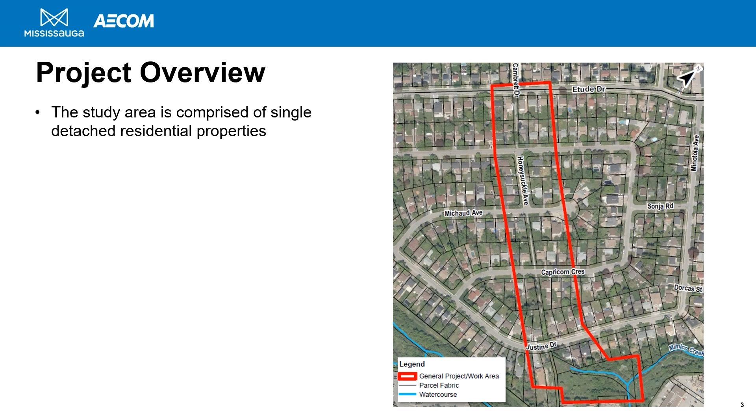The general area between Etude Drive and Justine Drive in Malton is comprised of mostly single detached residential properties and is subject to urban flooding during storm events, including the rainstorm that occurred on July 8, 2013, which affected a number of homes in the neighborhood.

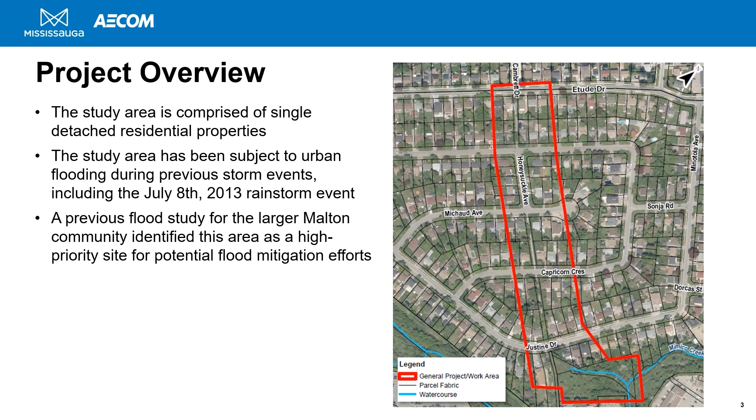Previously, a flood study for the larger Malton community, led by the Toronto and Region Conservation Authority, TRCA, was undertaken, which investigated flooding across the entire community and highlighted this area and others for potential flood mitigation efforts. Based on that study's findings, the city identified this area between Etude Drive and south of Justine Drive as a high priority site and initiated this flood study.

The goal of this study is to mitigate urban flooding risks to people, property, and infrastructure. The study has identified and evaluated various alternative solutions, including the preliminary preferred solution to help mitigate flooding.

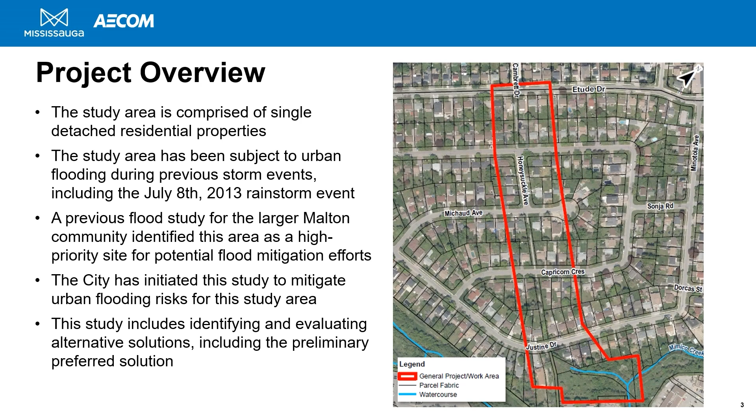The study is following the Schedule B planning and design process in accordance with the 2015 Municipal Engineers Association Municipal Class Environmental Assessment document. This included creating awareness of the project and engagement through notifications to agencies, stakeholders, Indigenous communities, and residents. Residents were also sent letters outlining the specific potential impacts to city-owned lands adjacent to their property beside the pedestrian walkway, within the road boulevard, or beside the outlet structure and channel.

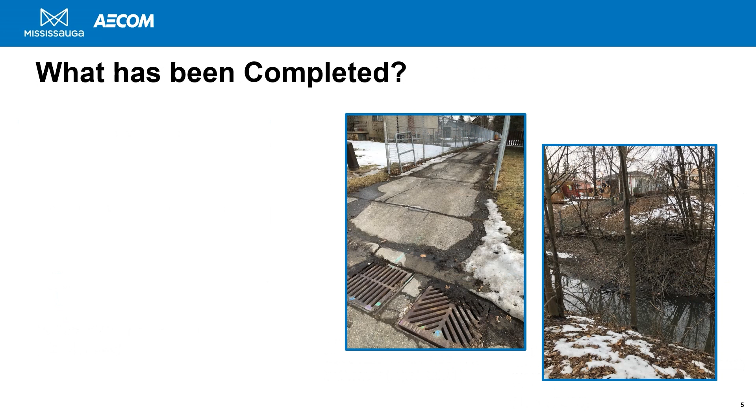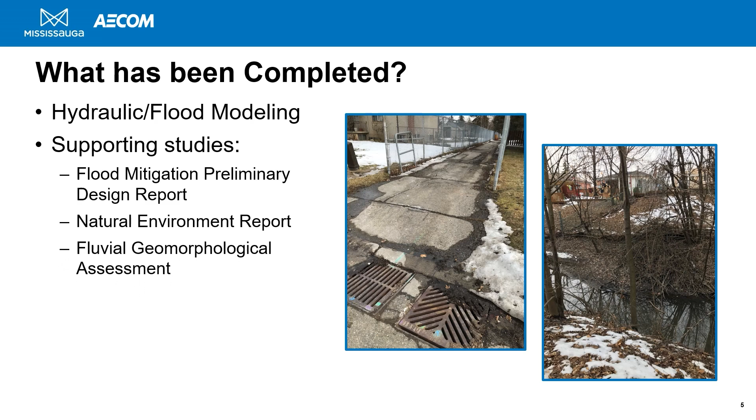The scope of this project involves hydraulic and flood modeling and supporting studies to understand the existing conditions of alternative solutions being evaluated and to support future project design. These include Flood Mitigation Preliminary Design Report, Natural Environment Report, Fluvial Geomorphological Assessment, Arborist Report and Tree Preservation Plan, Stage 1 Archaeological Assessment Report, Cultural Heritage Memorandum.

The Natural Environment Report includes an inventory of the existing natural environment conditions, including aquatics, including fish and fish habitat, vegetation communities, significant wildlife habitat, species at risk. Natural environment features within the study area include Mimico Creek and its surrounding natural area, in addition to street trees and public parks.

The Fluvial Geomorphological Assessment characterizes the fluvial geomorphological conditions along the tributary of East Mimico Creek and East Mimico Creek itself, including delineation of reaches, including their stability and any potential erosion concerns, as well as future channel design considerations.

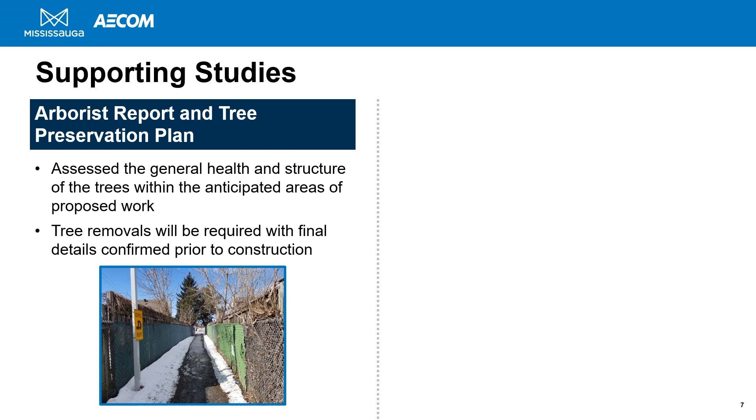The Arborist Report and Tree Preservation Plan assessed the general health and structure of the trees within the anticipated areas of proposed work. Tree removals will be required for all of the alternative solutions, with final details confirmed for the preferred solution prior to construction.

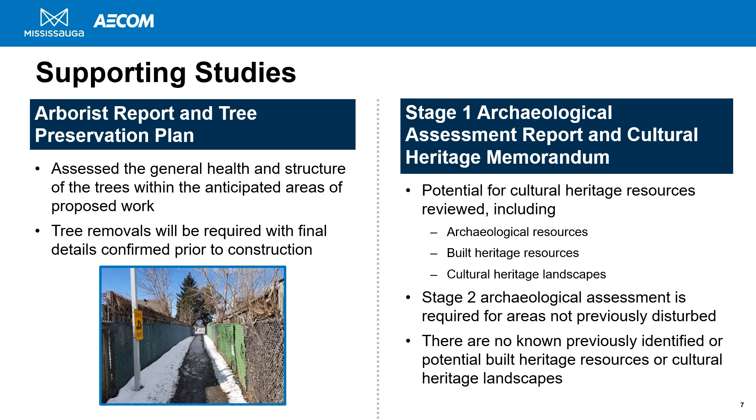The Stage 1 Archaeological Assessment Report and Cultural Heritage Memorandum reviewed the potential for cultural heritage resources, including archaeological resources, built heritage resources, cultural heritage landscapes. A Stage 2 archaeological assessment is required for areas not previously disturbed prior to construction. There are no known previously identified or potential built heritage resources or cultural heritage landscapes associated with any of the alternative solutions.

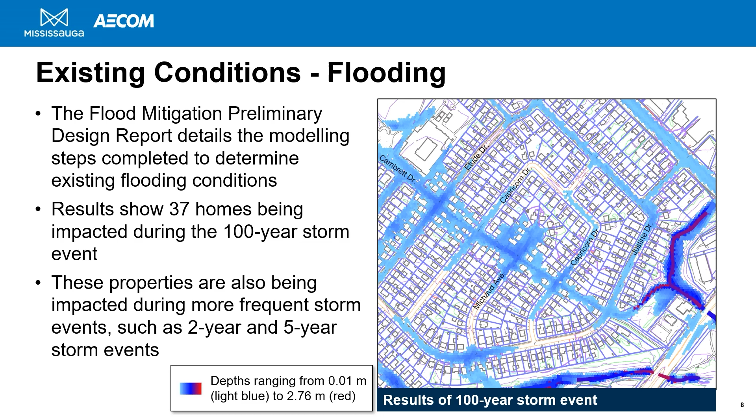The Flood Mitigation Preliminary Design Report details the modeling steps completed to determine existing flooding along the study area. Results show 37 homes being impacted during the 100-year event. These properties are also being impacted during more frequent storm events, such as 2-year and 5-year events.

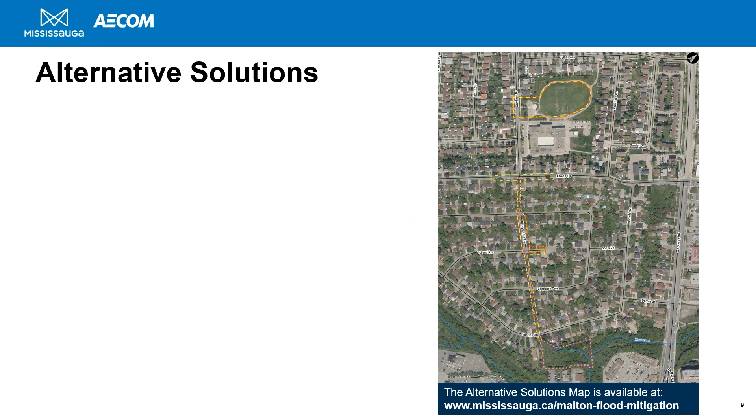5 possible alternatives to reduce or eliminate flooding were explored. All solutions are limited to city-owned lands and/or public right-of-way. Alternative 1 involves replacing the existing storm sewer beneath the pedestrian walkway and within existing city property from Etude Drive to the Mimico Creek outfall channel in Dairy Greenway Park, regrading the walkway and complete outlet upgrades south of Justine Drive.

Alternative 2 involves constructing underground storage in Ridgewood Park, installation of a new relief sewer within the right-of-way, regrading of the pedestrian walkway within city property from Etude Drive to Mimico Creek, and outlet upgrades south of Justine Drive. Alternative 3 involves constructing underground storage in Ridgewood Park, installation of a new relief sewer within the right-of-way, and outlet upgrades south of Justine Drive.

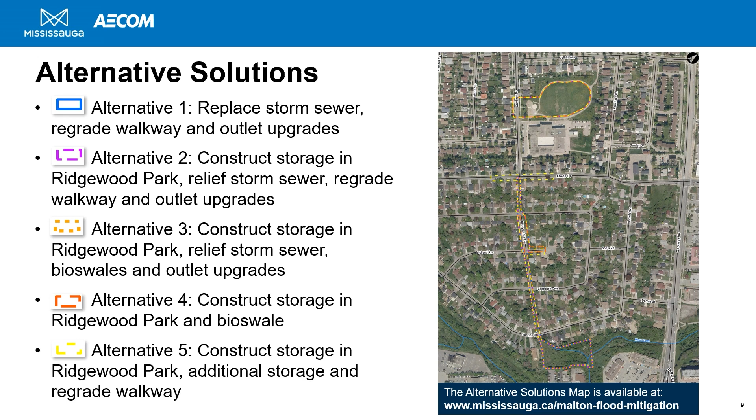Alternative 4 involves constructing underground storage in Ridgewood Park and a bioswale. Alternative 5 involves constructing underground storage in Ridgewood Park, along with additional storage in the right-of-way and regrading of the pedestrian walkway within the existing city property from Etude Drive to Mimico Creek.

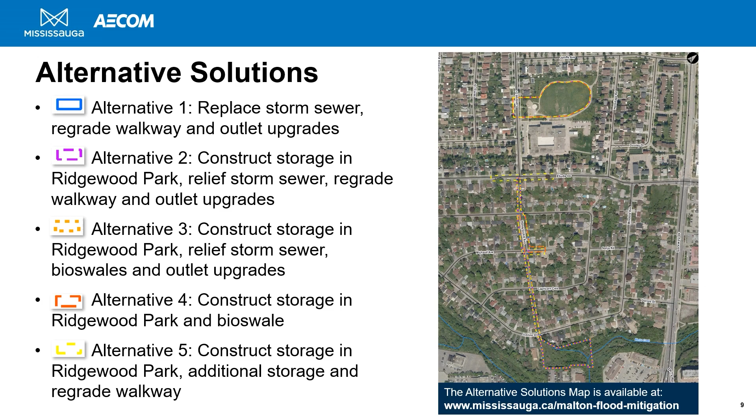The alternative solutions were assessed against various land use, technical, natural environment, socio-cultural environment, and cost-related criteria to determine which alternative had the least overall impact. This included consideration of impacts to property. Based on the evaluation, Alternative 1 was identified as the preliminary preferred solution.

This involves replacing the existing storm sewer with a larger box storm sewer beneath the pedestrian walkway and Honeysuckle Avenue within the existing city property from Etude Drive to the outfall channel and associated restoration. There will also be regrading of the walkway for an overland flow route. The preliminary preferred solution also includes outfall upgrades south of Justine Drive at the outfall channel in Dairy Greenway Park that flows into Mimico Creek.

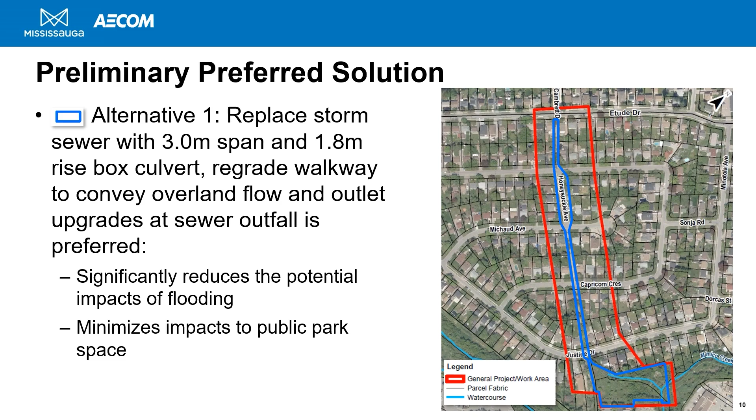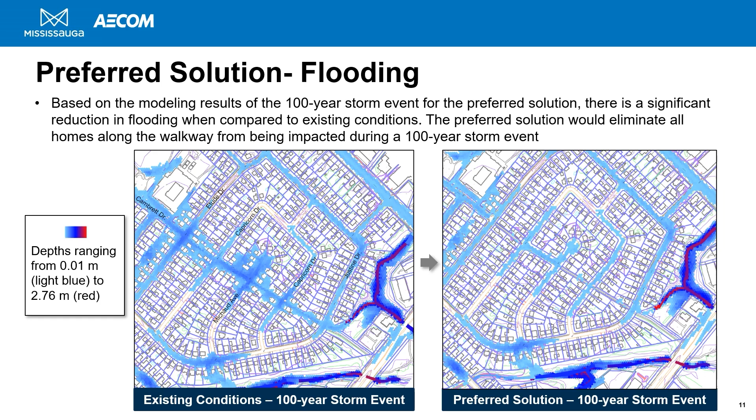This solution significantly reduces the potential impacts of flooding to properties in this specific area, minimizes impacts to public parks, and has a lower overall cost when compared to the other alternatives. Based on the modeling results, there is a significant reduction in flooding. The implementation of the preferred solution would eliminate all homes from being impacted along the walkway during a 100-year storm event.

The intent of these conceptual renderings is to demonstrate the extent of the work and its potential impact. As shown, the existing storm sewer will be replaced with a larger, new box storm sewer beneath the pedestrian walkway and within the existing municipal property from Etude Drive to Mimico Creek. This will convey more storm flow away from road right-of-ways and private property to significantly reduce flooding in the area.

Complete reconstruction of the pedestrian walkway and relocation of the chain link fence to the city's property line, which extends beyond the existing chain link fence, will be undertaken to allow construction of the box storm sewer and allow the city to access and maintain these lands and infrastructure going forward.

This means that objects illegally encroaching on city property, such as fences, trees, shrubs, etc., will be removed prior to construction. It is intended that removals would be at the city's expense, understanding these encroachments may have been placed by past homeowners. Best efforts will be made to keep existing trees wherever possible, both along the walkway and within Dairy Greenway Park, and new trees and vegetation will be planted for those removed.

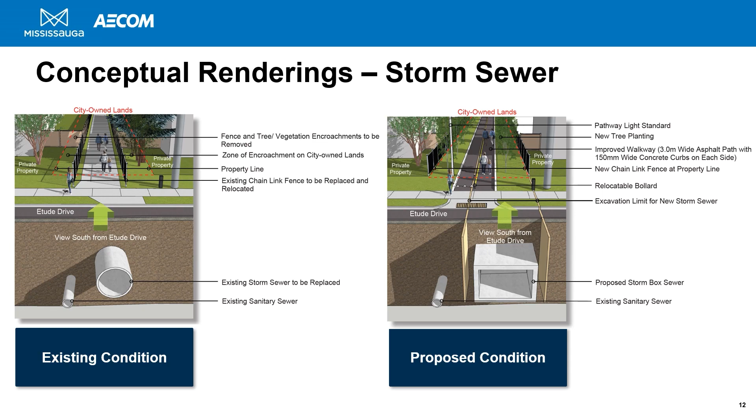There will also be significant improvements to the walkway itself, including a more formal and modernized multi-use trail. Safety and accessibility improvements will also be incorporated through different aspects of the walkway, such as improved lighting, updated signage, new bollards at road crossings, better sight lines, and more. Certain design aspects will help to deter loitering and litter, such as avoiding walkway benches and upgraded lighting.

The preferred solution includes a new, larger outlet structure and channel realignment south of Justine Drive, upstream of Mimico Creek in Dairy Greenway Park. The channel design will dissipate flows to minimize downstream erosion. The proposed channel upgrades are not anticipated to cause flooding downstream along Mimico Creek.

The existing outfall will remain in place while the new outfall is installed beside it, which will lessen construction impacts and disturbances in the area. Efforts will be made to avoid impacting trees and vegetation in the park with new plantings for those that end up requiring removal.

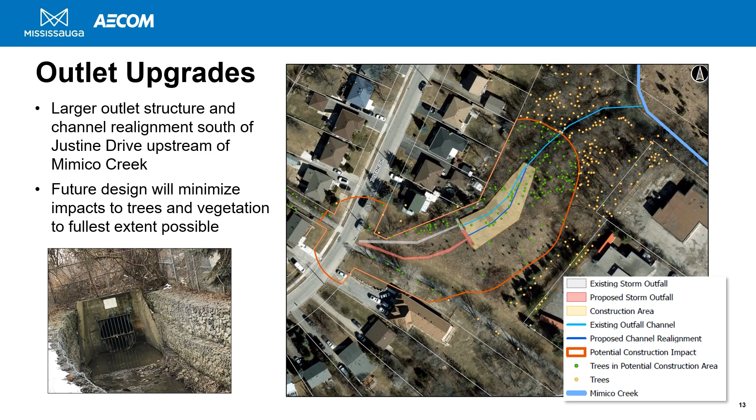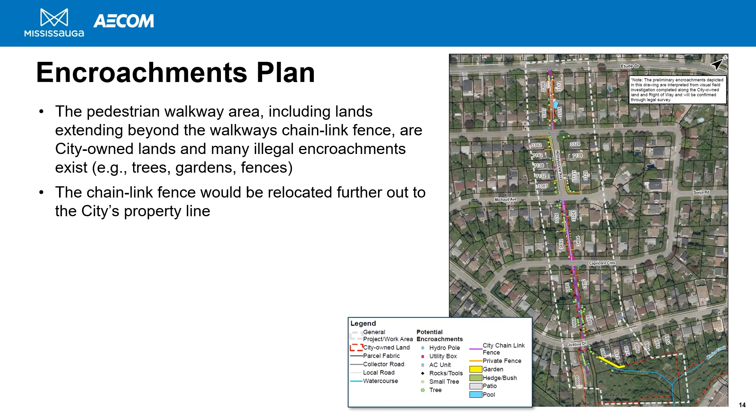The pedestrian walkway area, including lands extending beyond the walkway's chain link fence, are city-owned lands, and many illegal encroachments exist in this area, such as trees, gardens, fences, etc. The chain link fence would be relocated further out to the city's property line to allow construction of the box storm sewer and allow access and maintenance of these lands and infrastructure.

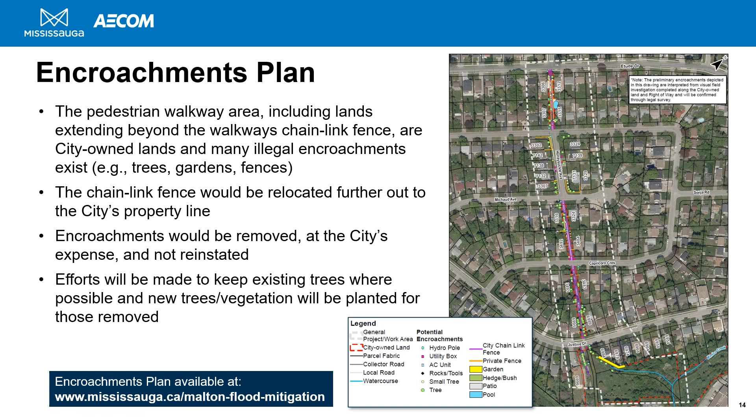Encroachments would be removed at the city's expense and not reinstated in order to construct the box culvert, outlet structure, and channel. Efforts will be made to keep existing trees where possible, and new trees and vegetation will be planted for those removed. A copy of this plan is included on the city's project webpage.

A Notice of Public Impacts letter was mailed out in April 2021 to directly affected property owners. The purpose of the letter was to provide a project update, share the preliminary preferred solution, and identify specific encroachments adjacent to properties and the city's plan for encroachments. The city requested feedback and many residents provided their thoughtful comments. Thank you to everyone who provided feedback.

Residents confirmed their past flooding experiences and expressed support for the solution. Several residents had inquiries and expressed some concerns regarding specific encroachments on the city's property that would be impacted by the project. Concerns were expressed about loitering and litter and how these would be addressed through the new walkway design. Minimizing tree and vegetation removals and maintenance of the walkway were also important issues for residents.

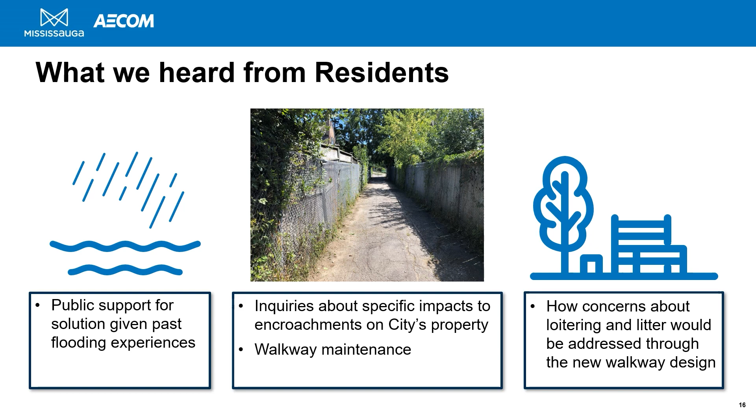Efforts will be made to keep existing trees and shrubs where possible, and impacted trees will be replaced elsewhere within the city's property if there is adequate space. Other encroachments within the city's property that are removed will not be reinstated. The removal of encroachments will be at the city's expense, understanding that encroachments may have been placed by past homeowners.

After viewing this presentation, we would like to receive your feedback on the recommended flood mitigation plan and move forward with completion of the environmental assessment phase of the study. Following the PIC, a project file report documenting the environmental assessment planning process will be prepared, and a notice of completion will be posted seeking public feedback into the project file report.

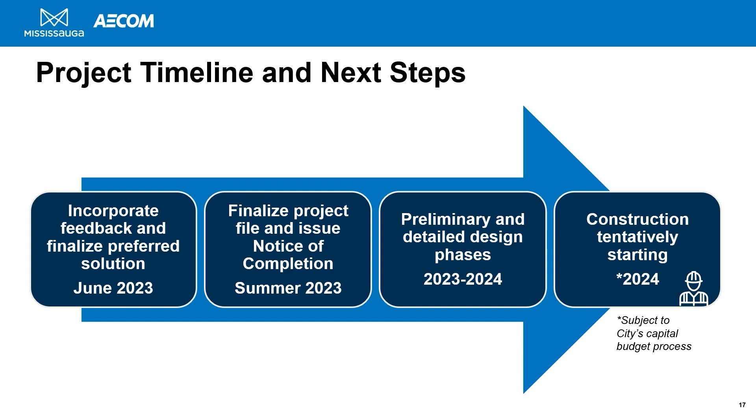The design phase is anticipated to be finalized over 2023 and 2024, and construction may start as soon as 2024, subject to the city's capital budget process and receiving all necessary approvals.